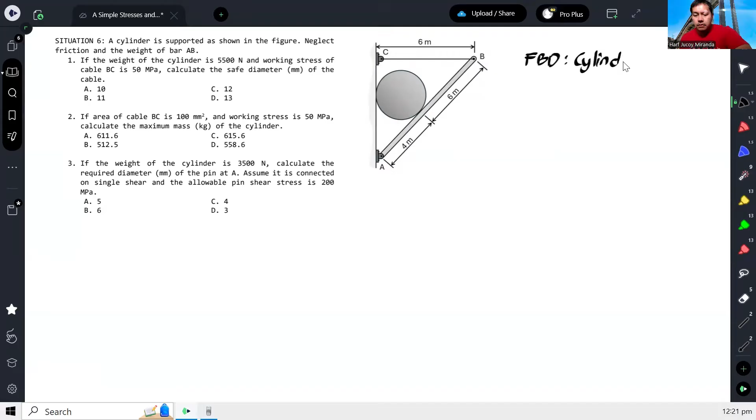Let's start with the cylinder. So this is the FBD of the cylinder. Let's say this is the cylinder, this is its center, and here is its weight.

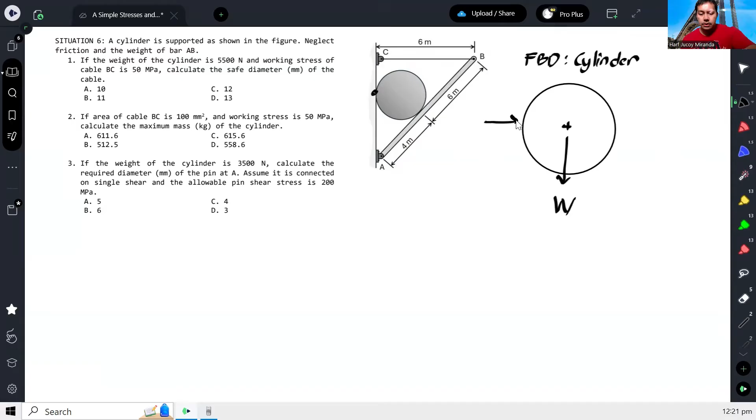We neglect friction, so there's no frictional force on either surface, only normal forces. Of course we can create relations from this.

But let's do that later. Let's move to the free body diagram of bar AB. Let's say this is bar AB, and this is the FBD of AB. Here is point A, and here is point B.

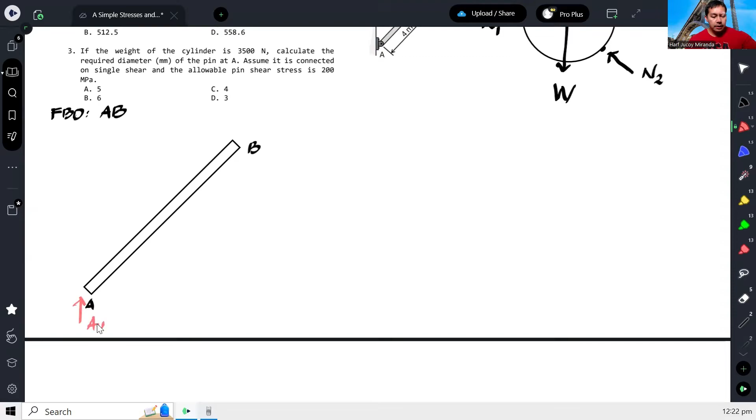At point A, we have the reaction of the support, which we'll call AY and AX. We just assume the directions for now. Then at the top, at B, we have the tension in the cable, which we'll call T.

And then, at the contact surface, there's a transmitted normal reaction N2, perpendicular to the surface of contact.

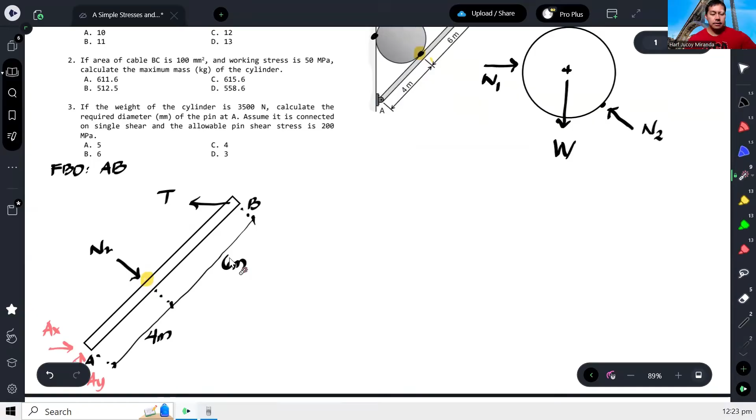To do that, we need to first relate this tension to the weight of the cylinder, since the weight is given. For number one, the weight of the cylinder is 5,500 newtons, and the working stress of cable BC is 50 megapascals.

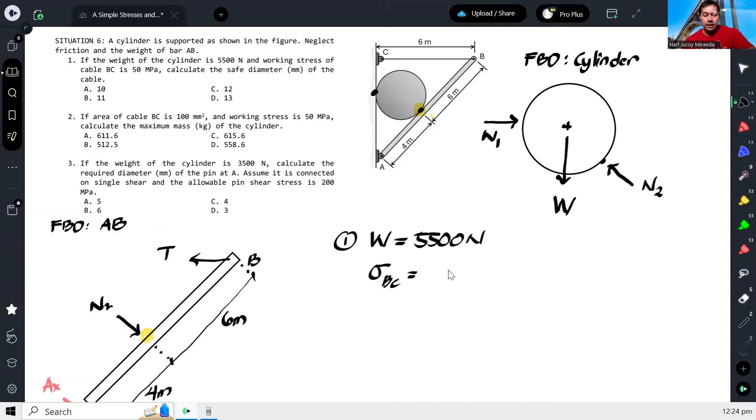To design the cable, we need the actual stress in BC, which is the allowable stress, not to exceed 50 megapascals. The stress in BC is simply the tension force divided by the area of the cable, and this should not exceed 50 megapascals.

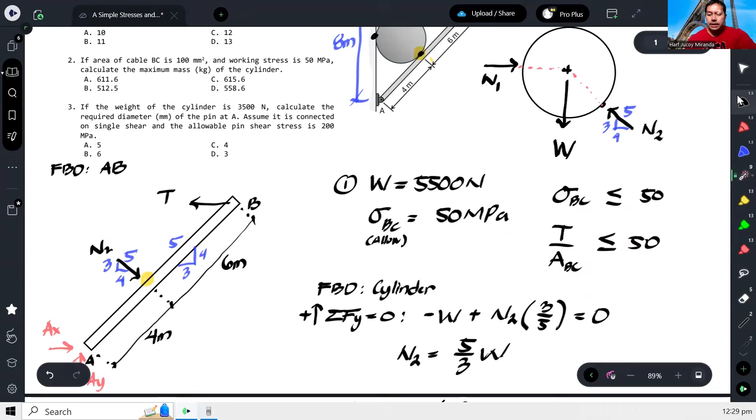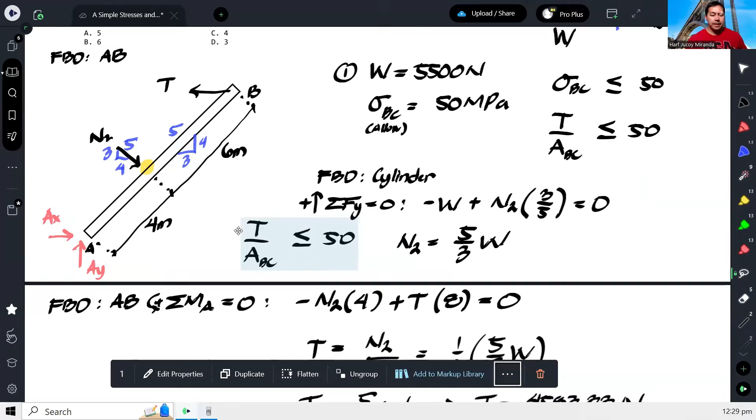Ito na, we can now apply this. So sabi natin kanina, yung actual stress should not exceed yung working stress na 50. So now that we know the tension in the cable, lumalabas this is 4583.33 newtons over yung area ng cable, we assume circular kasi diameter yung tinatanong.

So pi over 4 times diameter squared should not exceed 50 megapascals. Ito dapat ay naka-newtons, ito ay naka-millimeter squared, para maging megapascal, which is tama naman, no? So we just need to solve for the diameter.

Kapag sinolve natin yung diameter, i-cross-multiply natin yung diameter sa kabila, tapos i-divide natin ng 50, tapos sabay square root. So magiging ganito: 4583.33 over pi over 4, ibababa ko yung 50, kumbaga di-divide natin yung 50, ayan. Tapos kumbaga nandito na yung diameter squared. Tapos i-apply natin yung square root. So burahin natin to, tapos square root.

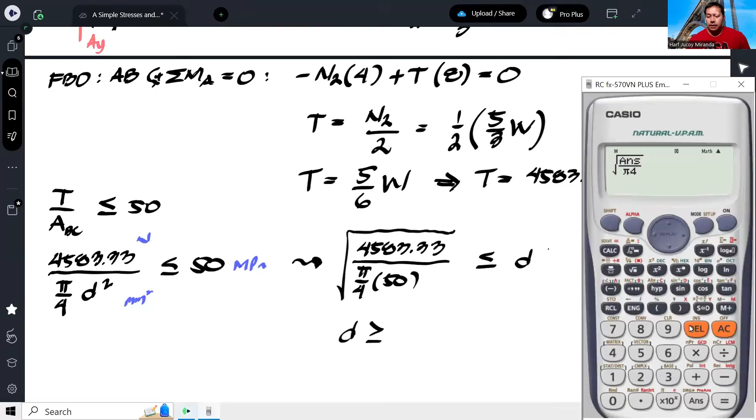Ayan, okay, so that we can determine ano yung minimum diameter na kailangan. So lumalabas, kapag binaliktad natin, yung diameter ng cable should be greater than or equal, kasi pag binaliktad mo, magbabaliktad din yung inequality sign, no? So pi over 4 times 50. Okay, and that gives us 10.8 millimeters.

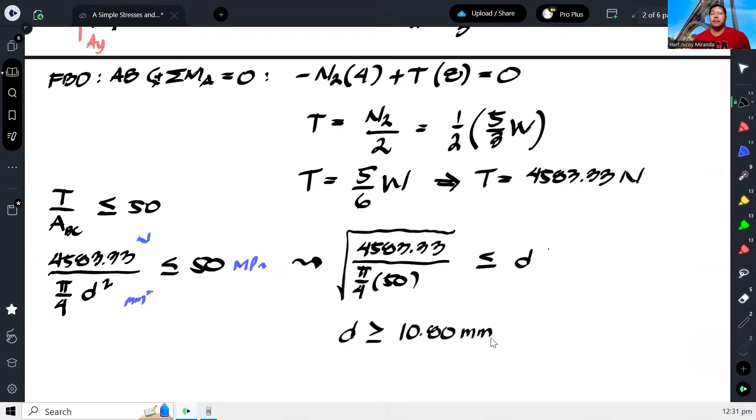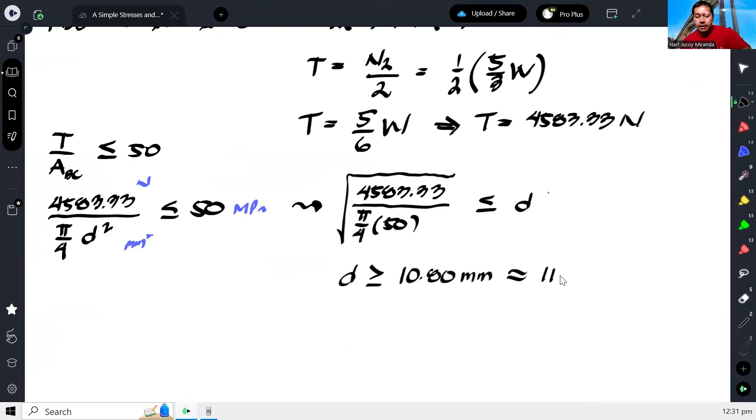So 10.8 millimeters, yun yung minimum na diameter para hindi siya masira kapag yung weight ng cylinder ay 5,500. So ibig sabihin, if you look at the choices, naka-whole number kasi, so it is safe to round this up to 11. Ayan, so our answer would be 11 for number 1.

Next, if the area of the cable BC is 100 millimeters squared and the working stress is also 50 megapascal, calculate the maximum mass of the cylinder. So ito baliktad naman, binigay na yung area, binigay na yung working stress, pinapahanap naman kung ano yung mass ng cylinder. So ito yung sinasabi ko kanina, it's much better that gawa lang tayo ng relationship. So ito na yung relationship natin.

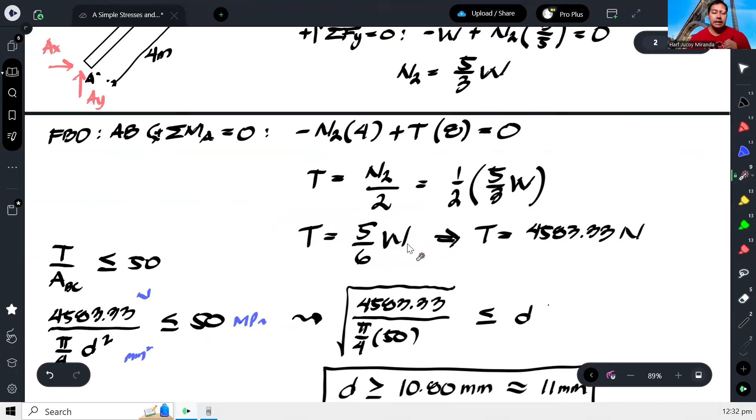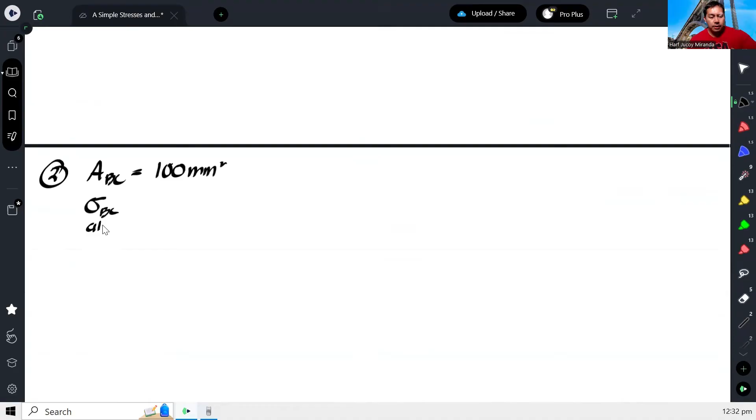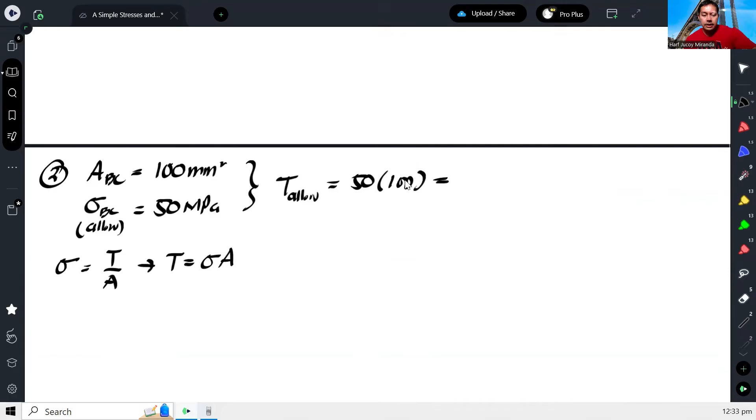So hindi ba dito, we can define yung allowable tension. Okay, and that is what? Di ba, stress is equal to force over area, so therefore yung force ay stress times area. Multiply lang natin ito: 50 times 100, and that gives us 5,000 newtons.

So hindi dapat lalagpas ng 5,000 newtons yung tension sa cable para maging safe yung system natin against instability. So now, from earlier, we know that the tension is equal to 5 over 6 ng weight. So this is the actual tension, 5 over 6 ng weight ng cylinder. Ibig sabihin, yung weight ng cylinder is 6 over 5 ng tension.

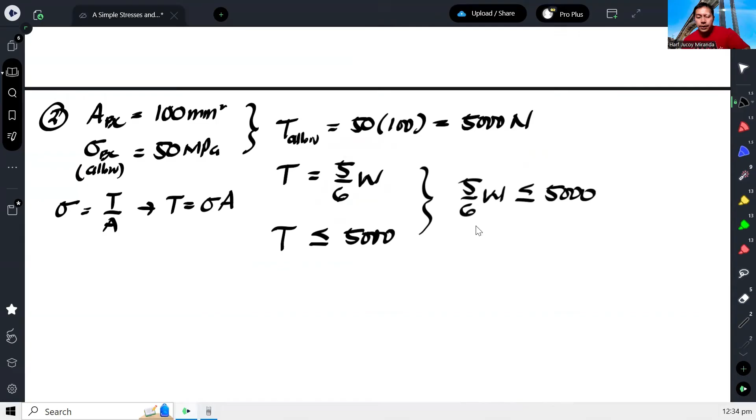Okay, and once again, yung actual tension should not exceed, dapat mas maliit siya doon sa allowable na 5,000. Since we know that the tension is 5 over 6 ng W, we will just substitute. So magiging 5 over 6 of W should not exceed 5,000 newtons. Therefore, the weight of the cylinder should not exceed 5,000 times 6 over 5, should not exceed 6,000 newtons.

Okay, the question asks for mass, so it should be in kilograms. It follows that the mass of the cylinder should not exceed a certain value. What's the relationship again? Weight equals mass times gravity, so mass equals weight over gravity. So we divide 6,000 by 9.81 to get kilograms.

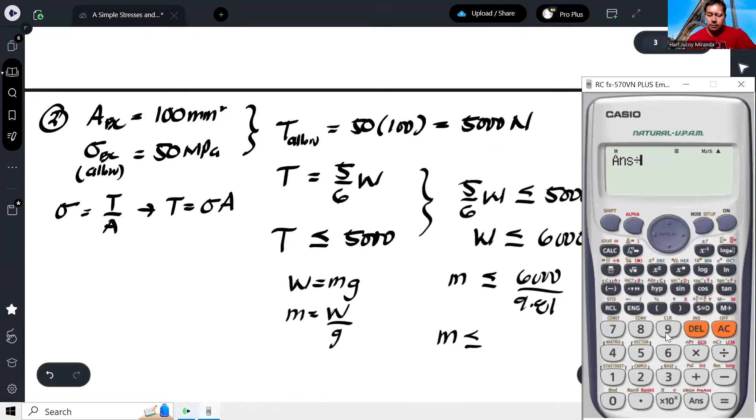So the mass should not exceed 611.62 kilograms. Okay, and that is letter A.

Last question: if the weight of the cylinder is 3,500, calculate the required diameter of the pin at A. Assume it is connected on single shear and the allowable pin shear stress is 200 megapascal. This time we need to analyze this connection. It's single shear, and the allowable shear stress of the pin is given.

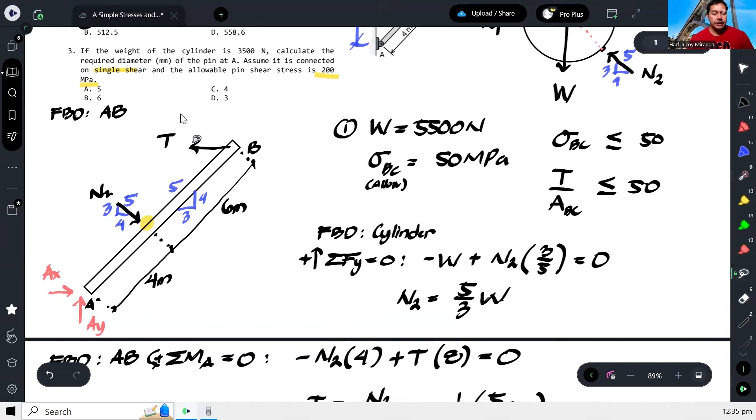So to calculate, first we need to know AX and AY. To solve that, we can just rely on the FBD. Let me copy this. So this is for number 3, our FBD.

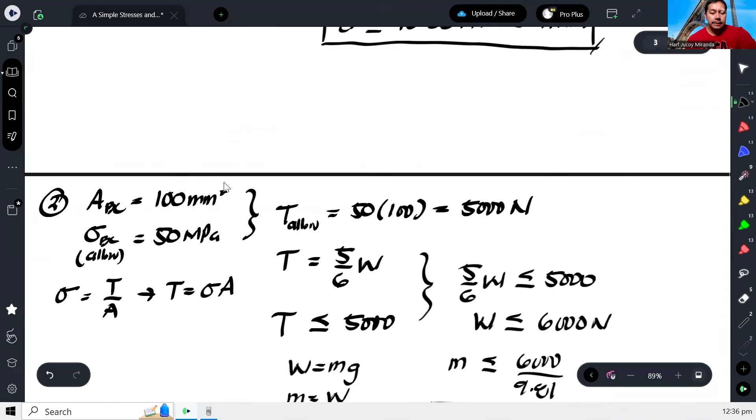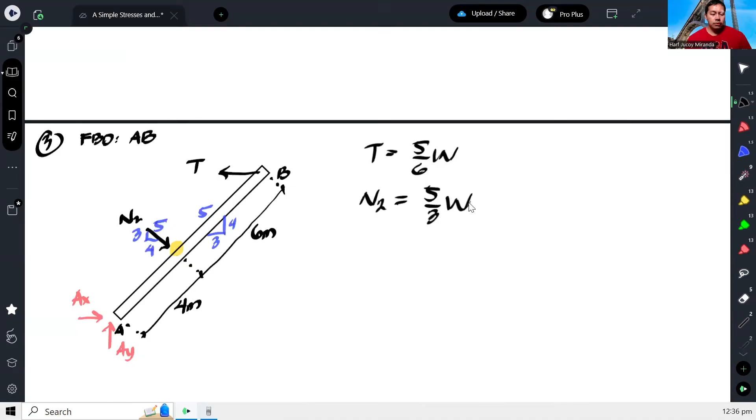Again, that's the advantage of creating equations rather than substituting everything right away, so you don't have to repeat work. Now, to solve for AY and AX, we already know the values since the weight for number 3 is given as 3,500 newtons.

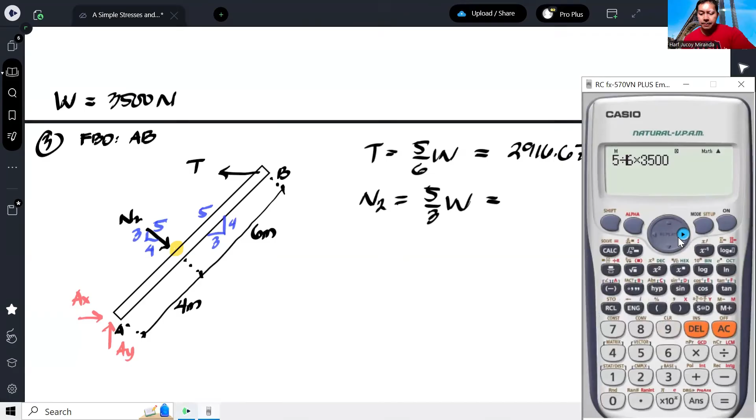So we can compute the tension and N2. 5/6 of 3,500 gives us 2,916.67 newtons. And the other one, times 5/3, gives us 5,833.33.

Okay, now that we have those, let's compute AX and AY. We can choose to take the summation of forces. Let's do summation of forces X equal to 0, assuming to the right is positive. AX I assumed to the right, then N2's component to the right is N2 times 4/5, and then minus T, all equal to 0.

So therefore we can calculate AX. Let's call this A the tension, and B the N2. So when we transpose, positive T, and N2 becomes negative. That gives us negative 1,750. The negative sign simply means the direction of AX is reversed — it should actually be to the left.

Now let's do summation of forces Y equal to 0, assuming upward is positive. We have AY, then the downward component of N2, negative N2 times 3/5. There's no downward component for T, so that's it. Therefore AY is just N2 times 3/5. Plugging in N2 gives me 3,500.

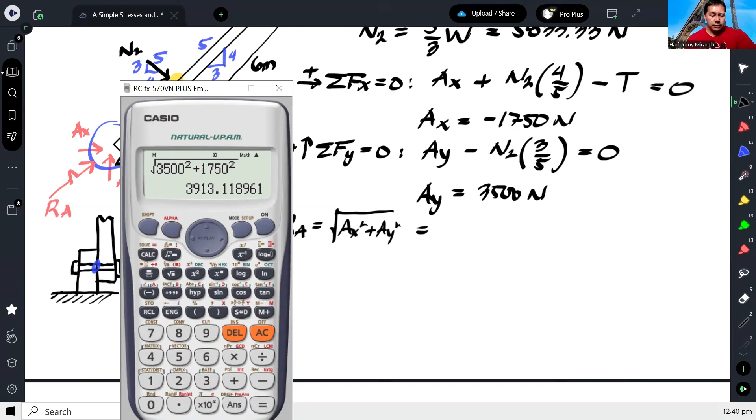So we need to know the required diameter here. RA is easy to compute — that's just the square root of AX squared plus AY squared. Square root of 3,500 squared plus 1,750 squared gives us 3,913.12 newtons, which is the force acting on the pin.

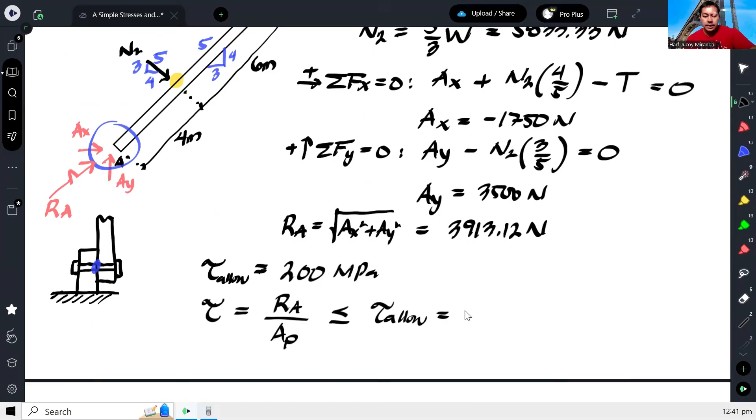The allowable shear stress of the pin, according to the problem, is 200 megapascal. The idea is that the actual shear stress should equal RA over the area of the pin, and it should not exceed the allowable value of 200.

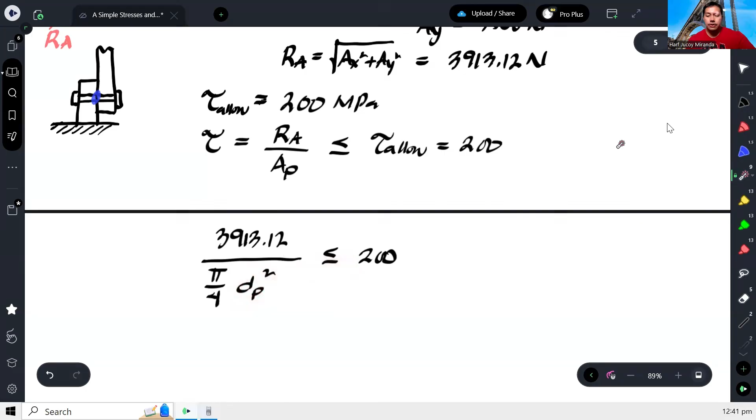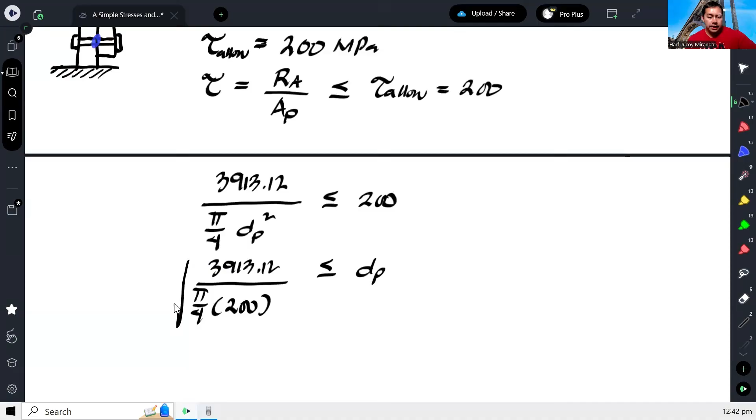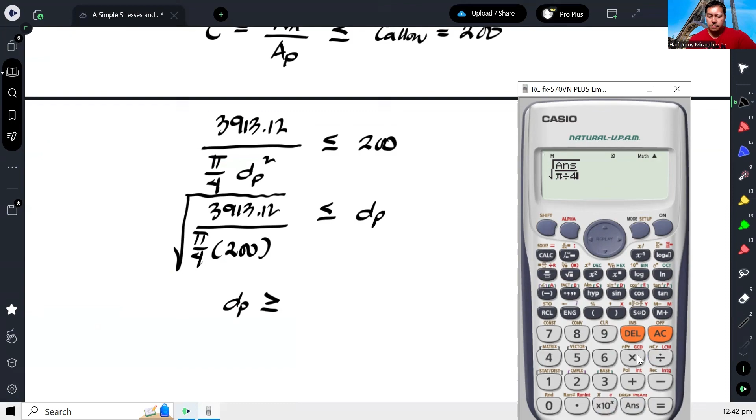So again, RA is 3,913.12 over the area of the pin, since it's circular — pi over 4 times diameter squared, and since it's single shear there's no times 2. This should not exceed 200. Once we cross multiply and apply square root, it looks like this, and solving for the required diameter of the pin gives 4.99 mm.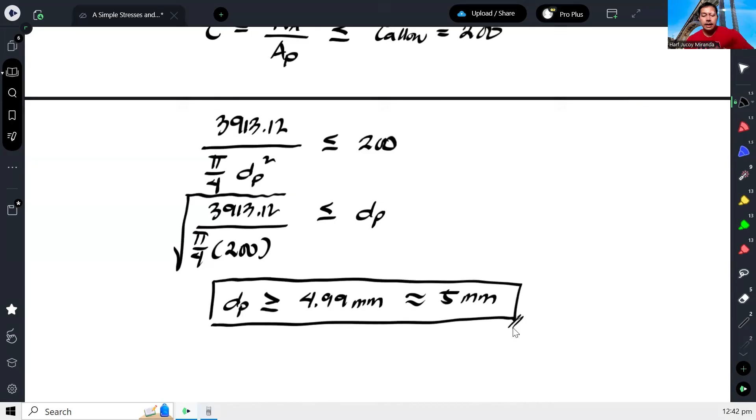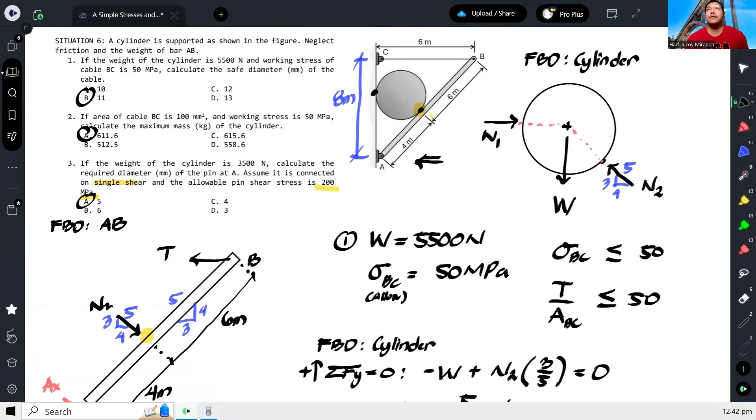Okay, or we can just round that up to 5 millimeters. So the answer for number 3 would be 5 millimeters. And that's how we solve this particular problem. Thank you for watching, and I'll see you in the next video.